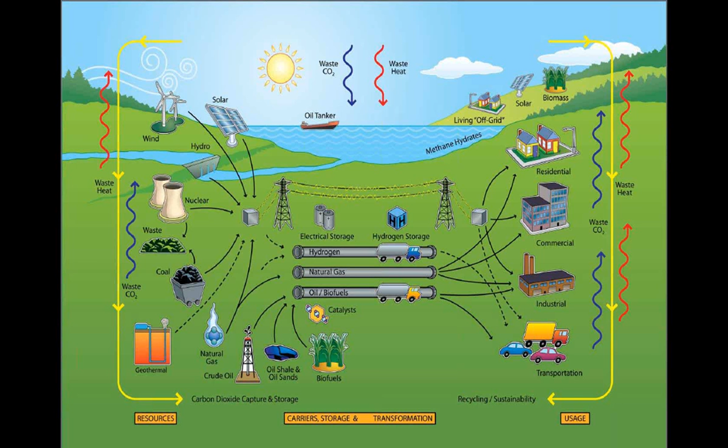So the next slide is primarily about hydrogen. This is called hydrogen fuel cell technology. Again, the application is a fuel cell. Back in India, we mostly use internal combustion engines, IC engines, for our gasoline or diesel vehicles. But the problem, again, is conversion efficiency. Internal combustion efficiency could be about 30 to 40%, compared to 65% and above for fuel cells.

The fuel cell is made of two electrodes, cathode and anode, separated by a membrane called a proton exchange membrane. What that means is it takes the hydrogen and permeates it through the electrode, whereas the electrons produced pass through the electrical lines, and then the hydrogen passing through the electrode combines with oxygen to form water, moisture. So basically hydrogen combines with oxygen to give power. At the same time, you get carbon-free exhaust, right?

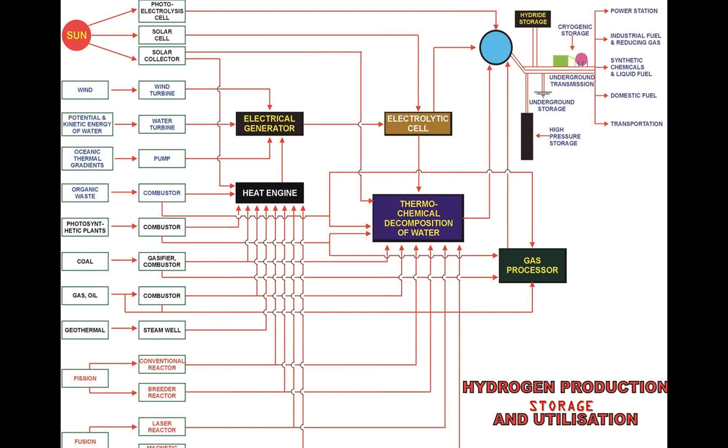I'm going to present two scenarios: the production of hydrogen without storage and with storage. The first part of the slide shows hydrogen produced by electrochemical treatment, which you can use directly in an internal combustion engine or fuel cell. That means use on demand: you only produce hydrogen as long as the vehicle is using it, and if the water or fuel is depleted, you have to go back and fill up the water and so on. That's not the safest way, and it's an expensive way without storage. You're using hydrogen on demand.

A number of companies like Millennium Cell promoted sodium borohydride for onboard storage. But the Department of Energy put a full stop to that because it's not viable. Sodium borohydride undergoes hydrolysis to produce enormous hydrogen, but at the end of the day you produce sodium borate that needs to be regenerated. That's tricky. So we need to look for reversible hydrogen storage. The first option has some limitations.

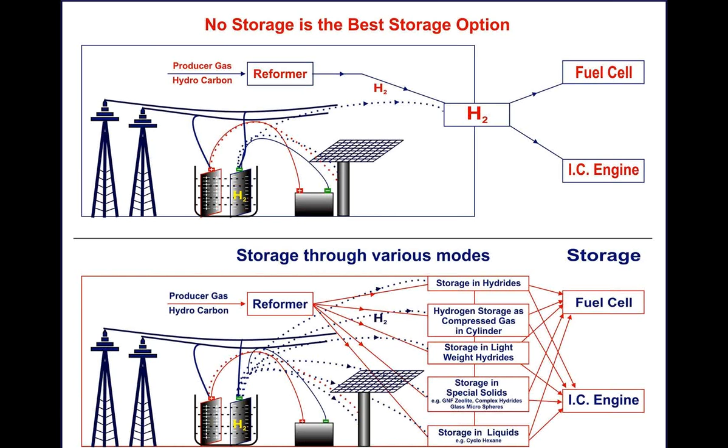Right. This is an animation of how a fuel cell works. So initially the hydrogen comes from a tank or any hydrogen storage material. That hydrogen, H plus, is allowed to permeate onto the proton exchange membrane and then, mixed with the available oxygen from the atmosphere, it forms water. On the other side, the hydrogen also produces electrons. The electrons pass through the electrical lines of a circuit that produce electricity.

So the hydrogen is used as a source. At the same time, it produces water, so you don't have to worry about the carbon species. Whereas the electron is enough for lighting, or you can use your utilities like fan, light, and other utilities to function. So for this, what do we need?

We can supply the hydrogen from the source. We can use these fuel cells to run for producing electricity, but we need something to store the hydrogen. The hydrogen storage should go before the fuel cell. That way the hydrogen can constantly flow into the fuel cell. Then that can go into producing your automotive power. So this diagram shows how the PEM cell works in this case.

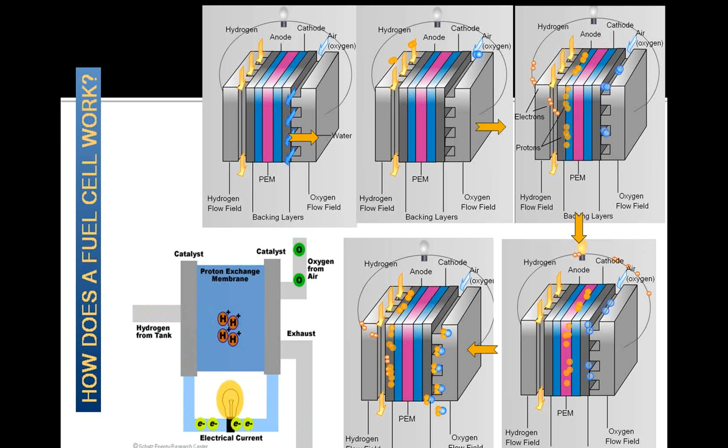Right. So now let me come a little closer to what I'm going to discuss. On the one side, the forecasted production of hydrogen needed is about 150 million tons per year. This is from the report by Dr. Dresselhaus from MIT. She did this for a special volume on hydrogen in 2005. A number of methods have been used, but still the targeted 150 million tons has not been achieved so far. Probably now it could be around another 10 or 15 million tons per year.

And on the fuel cell side, the cost is a big factor, the cost of the fuel cell tank. The Department of Energy goal is to bring it equivalent to the internal combustion engine, about $30 per kilowatt, whereas the forecasted price is about $3,000 per kilowatt. Again, these numbers may have changed a little because it's about 10 years now.

The storage is the one which is in between the production and the fuel cell. The storage is supposed to be 9.72 megajoules per liter of hydrogen. So far, we have achieved up to 4.5 to 5 megajoules per liter of hydrogen compared to gaseous hydrogen, which is at 10,000 psi. So there are a lot of drawbacks and a lot of challenging issues in how we will achieve the targets set forth by the Department of Energy or the automakers.

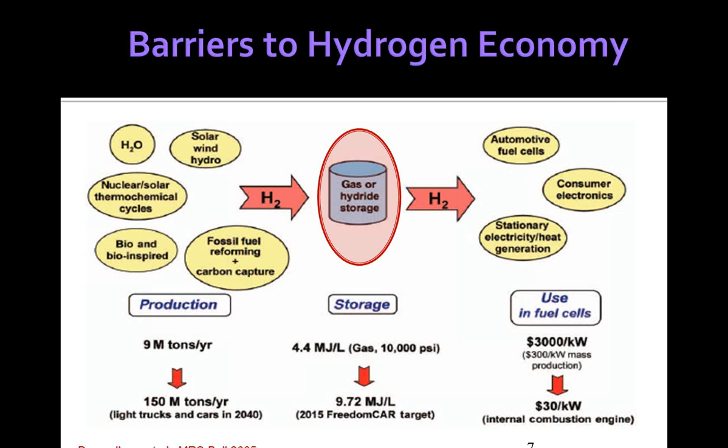Before coming to this, I would like to touch upon my background, where I started my hydrogen storage research. I was working on my problem related to hydrogen at Banaras Hindu University in the Department of Physics, BHU, where I was exposed to this technology by my advisor, Professor O.N. Srivastava. He was developing at that time some novel metal hydrides for storage in motorcycles, so that it can go about 70 to 80 kilometers of range, and then you can refill it with hydrides.

The reason is the hydrides are reversible. That means you can store and release the hydrogen back and forth, and therefore the hydride becomes spongy. It becomes more fluffy, so that it can absorb more hydrogen and desorb more hydrogen.

So I did my PhD there at BHU, and then I went for a postdoc at the University of Hawaii and the University of South Florida. BHU still has a number of vehicles transformed to hydrogen fuel cells or hydrogen internal combustion engines running on the roads. So with this introduction, I would like to draw your attention to a comparative chart of the volumes.

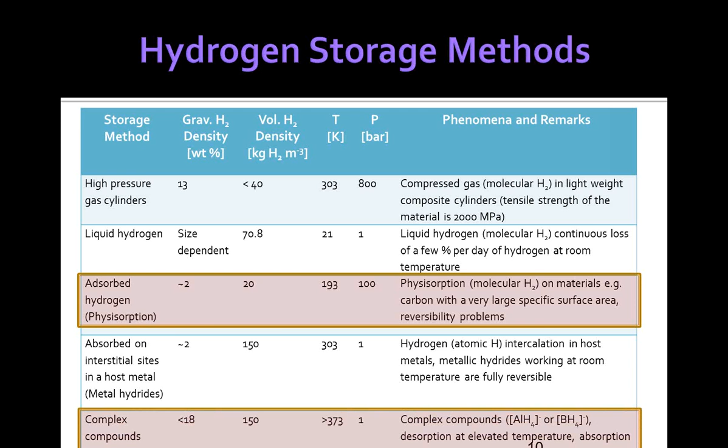So what we have done in our research is adsorb hydrogen by physisorption. We also looked into some polymeric compounds, polymer nanofibers and nanospheres, and then we have done some rigorous research on complex compounds based on lithium, magnesium, all the lightweight elements, with hydrogen storage properties.

So, Sridhar, how much time do I have? 20 minutes, sir.

Okay. So in this slide, we started from the macro picture. The macro picture means we started from the overall big scenario of energy production, storage, and fuel cells. And then we came down to the types of storage materials. So now let's get into metal hydrides, because those are the reversible hydrogen materials.

What is actually happening here is, on the top layer, you see the hydrogen is always in molecular form. The hydrogen molecule is supposed to split into hydrogen atoms, split by a catalyst on the surface. These hydrogen atoms are then located in the voids of a crystal lattice, which is called hydrogen stored in a solid compound. This process of metal plus hydrogen giving a metal hydride is called an exothermic reaction. I'm sorry, this is a hydrogen molecule.

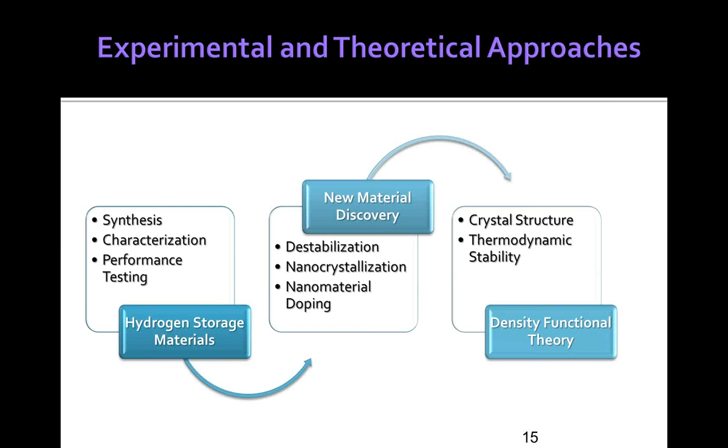So this I have discussed already, how we do the synthesis, characterization, and performance testing for hydrogen storage. We also use new material discovery through destabilization mechanisms, nanocrystalline and nanomaterial doping, and theories like density functional theory for looking at viable hydrogen storage materials for fuel cell and internal combustion engine applications.

This is again the big chart of what capacity or capability we have for looking at different systems. On the left hand side is a ball milling instrument for making hydrogen storage materials, with a very high revolution per minute, about 800 revolutions, a Sieverts manifold, a glove box for preparing these materials, and PCT - pressure composition isotherms - for measuring hydrogen absorption and desorption.

We also use simultaneous differential scanning and thermogravimetric analyzer, DSC, XRD - X-ray diffraction - transmission electron microscopy, scanning electron microscopy, AFM atomic force microscopy, and temperature programmed desorption to look at the gas analysis of the hydrogen coming out of the sample.

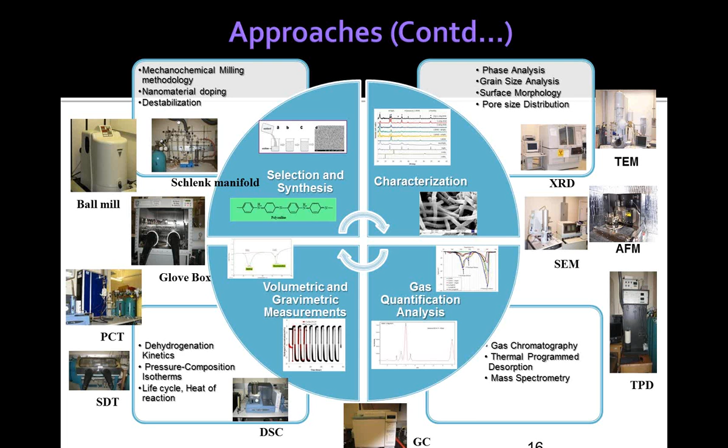So a couple of patents we have developed based on devising these materials. One of the patents, approved in 2013, is a method of generating hydrogen storing hydride complexes. The second one is hydrogen storing hydride complexes in terms of nanotechnology.

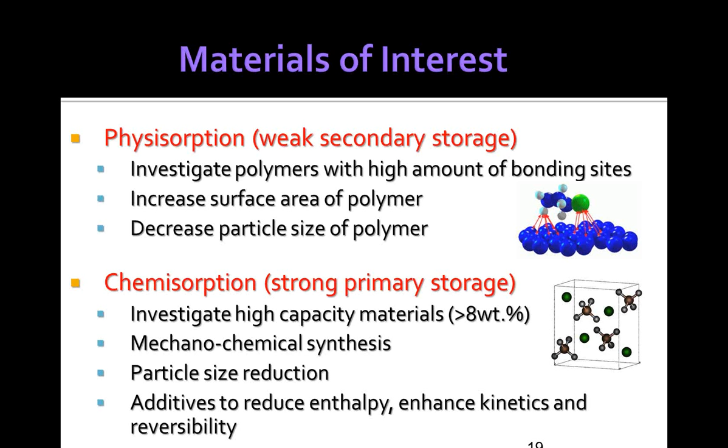So a couple of materials we were trying to understand - this is the physisorption of weakly bonded polymer nanostructures, to increase the surface area on polymer and decrease particle size. Also chemisorption of complex materials like lithium magnesium compounds using mechanochemical synthesis and particle size reduction, along with additives to reduce enthalpy and enhance the kinetics.

So with this, I would like to - I'm not going into detail with my research, but I will take another opportunity with IUCEE to go and explain the further research.

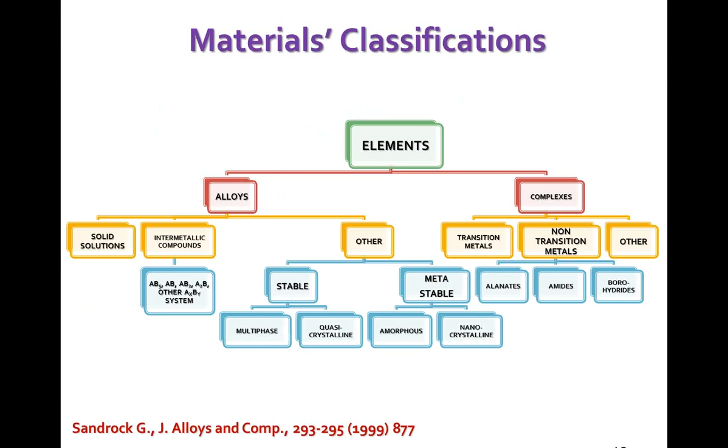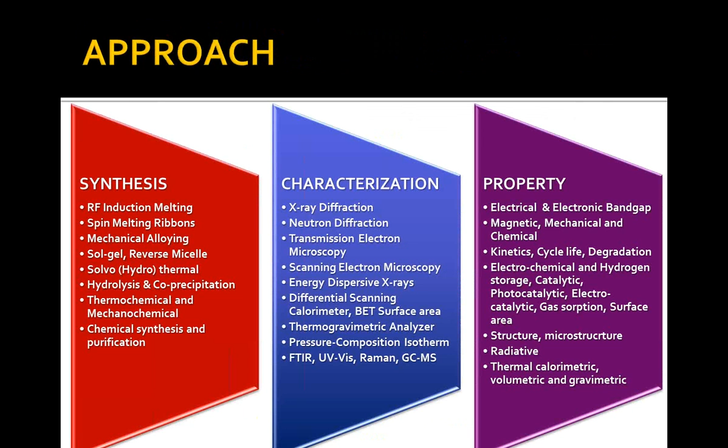System level energy input required to get 100 units of energy output. System energy, what? System level energy input required to get 100 units of energy output. Yes, theoretically, if you want to get the system energy to the level where you want to reach 2015 or 2020 targets, you need to eventually work toward 100% to get that output.